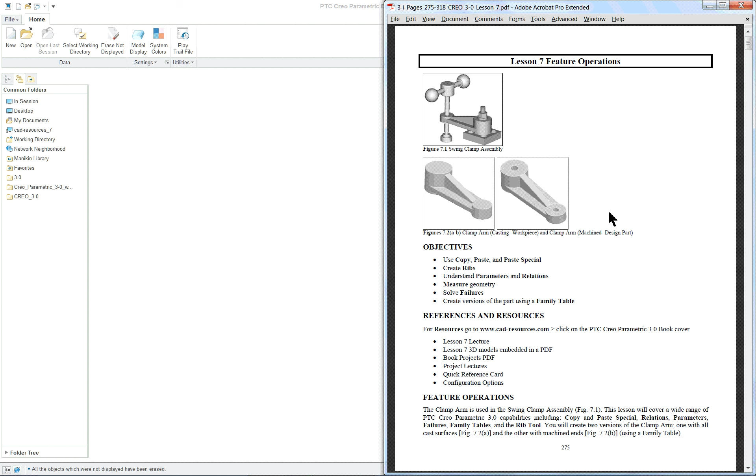Now this clamp arm is going to be used in the assembly drawing, and it's also going to be detailed in lesson number 10. So we're going to divide this into probably 3 different parts, and we're going to create the arm cast part, or workpiece, first.

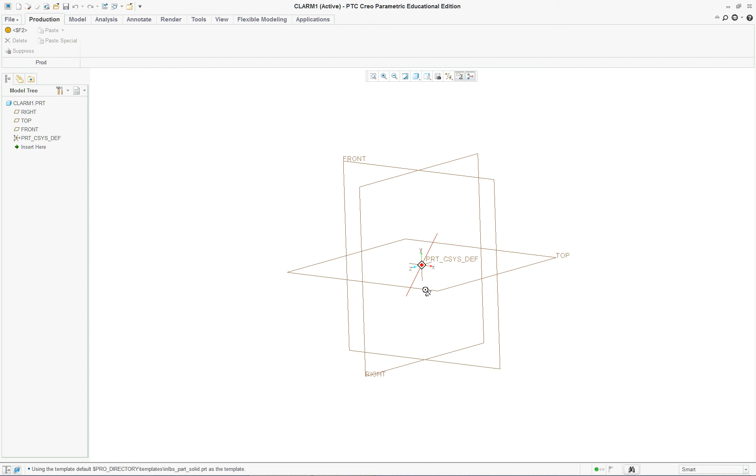Start with a new part, give it the correct name. I have my trimetric set, my standard orientation set to isometric, not trimetric, so I'm just going to rotate it around instead of going back in and changing it. I'll just work with it like it is. My first feature is going to be a simple extrusion.

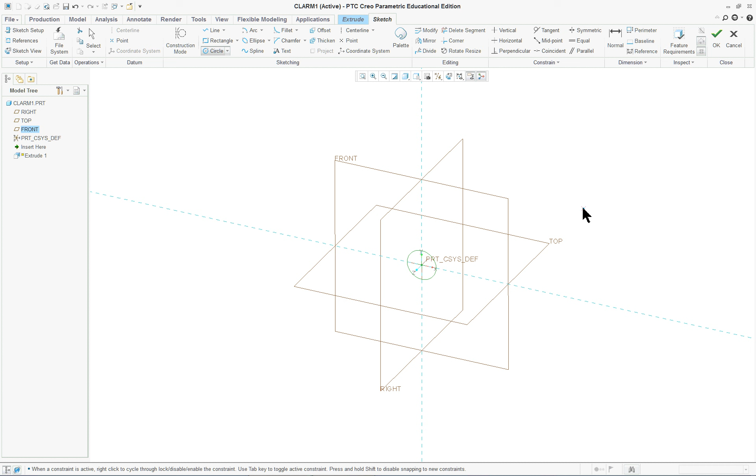I'm going to click on the front datum plane to sketch, right mouse button, circle. Circle in there, and I know the dimension of the circle is going to be 2 inches. Right mouse button, OK, and the depth is going to be 1.75.

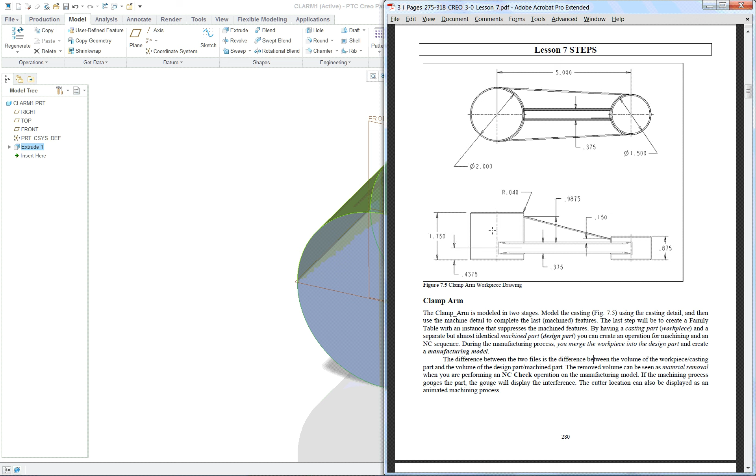Click. And if I go back over to here, I can take a look at some of these dimensions. So I made this first round protrusion here, 1.75 in depth, 2 inches in diameter.

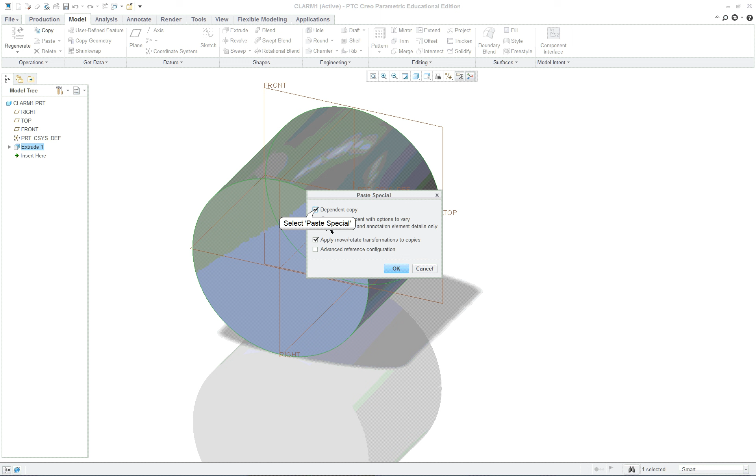Now it's still active, you can see it's selected over here. So what I'm going to do is click on copy and then paste special, and I'm going to apply rotate and movement to it. I'm going to turn off the dependent copy, I should say, so it will be independent.

And what it's looking for is a movement directional reference. So I'm going to come and select the datum plane that passes through the middle here, the right datum, and I'm going to drag it to 5 inches. Double click 5, that's the easiest way.

So I have my first feature and I'm copying that feature. I'm going to leave it in 3D when I work, and I'll leave the shading on with reflections.

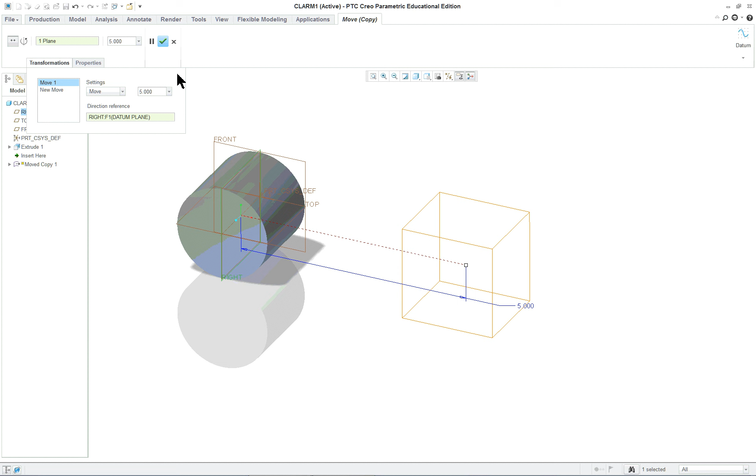Check. Now if I click right mouse button, edit, it's going to only give me the dimension in between the two copy, or the copy and the original.

If I deselect by clicking the left mouse button anywhere, and I double click onto the copy, since I made it independent, I'm going to change the depth here to 0.875, and the diameter to 1.5.

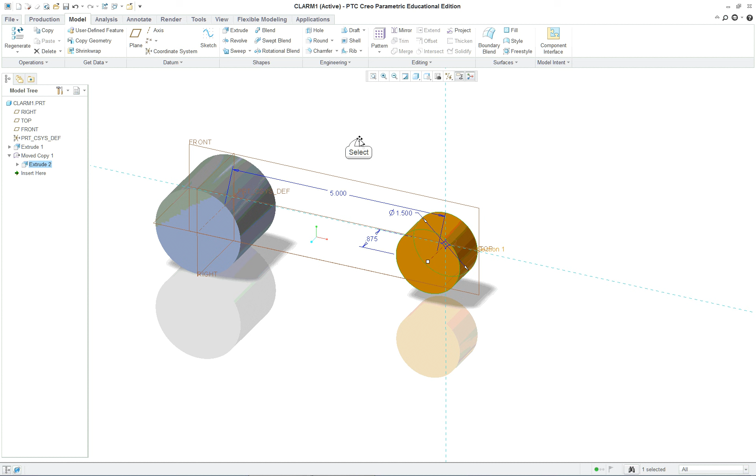Now I'm going to click with my left mouse button and click again, and it regenerates. So the next feature I'm going to create is a web between the two, and I'm going to start off by putting in a datum plane I can work with.

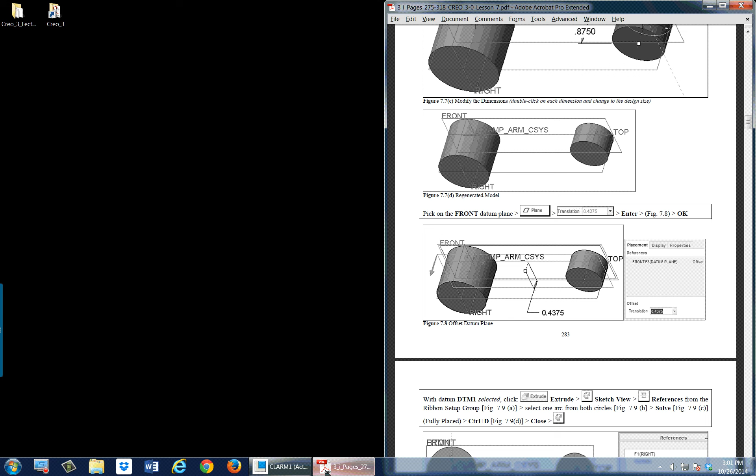So I'm going to select the front datum plane, and then select plane as the tool, and you can see it offsets it, and the size that I want here is 0.375, 0.4375, and enter. Click OK, and I have my new construction datum that I'm going to use.

So I want to make a web between these two. This web won't have any dimensions. So I'm going to click on extrude, and I'm going to still work in 3D. In the book, it makes you go into the sketch view in 2D.

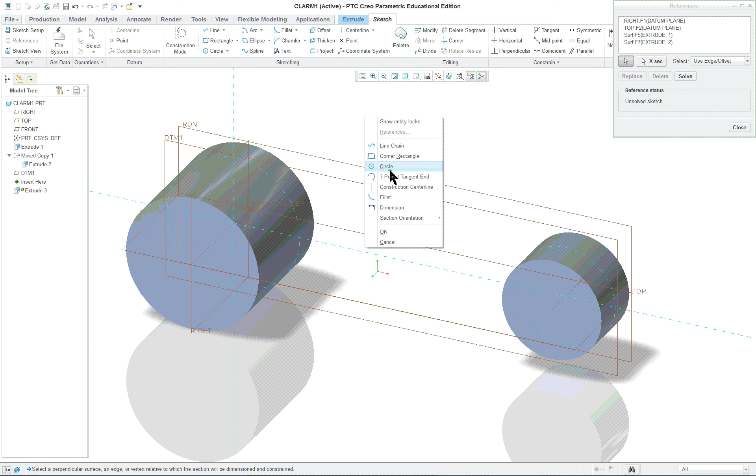So here, right mouse button, circle. Oh, before I do, sorry, middle mouse button, and I want right mouse button, use references as my selection, and pick on the two curves. Now when I go in and select circle, it's going to lock into the middle when I click there, and lock into the reference. Basically I want to repeat that.

Click the middle for our first reference and then the edge, like so. So you can see I actually have a section, but it has two circles instead of anything connecting them.

So what I want to do is go up to the line tool, select line tangent, and pick on the two curves on the top and then the two curves on the bottom. You'll see the T show up.

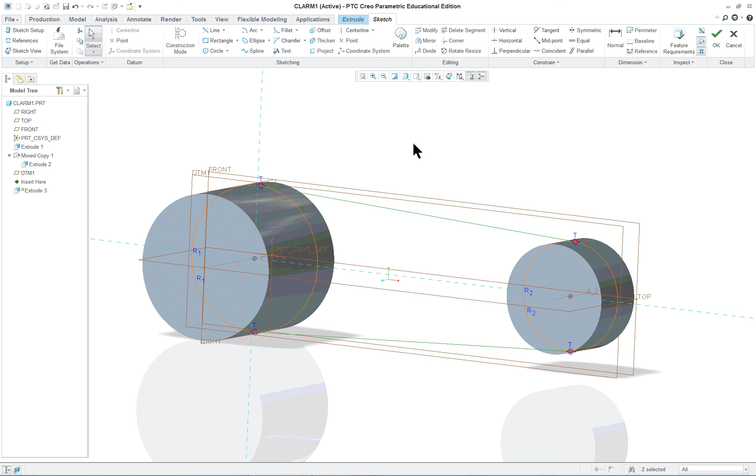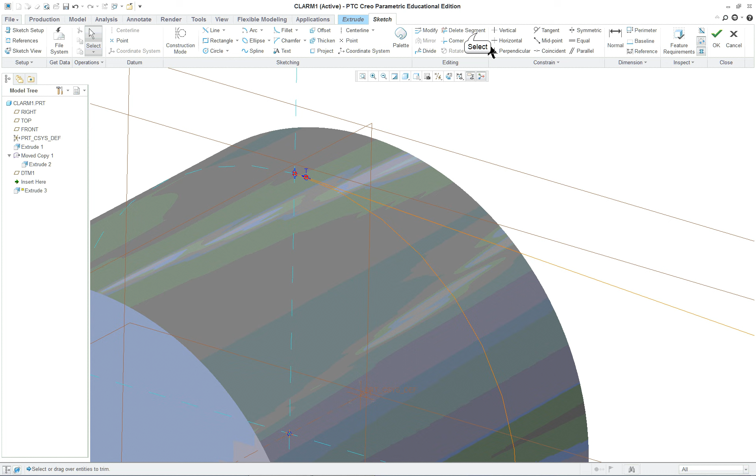Middle mouse button. Now it's got overlapping geometry, so I'll click delete, and I'm going to delete by dragging a spline through the outer edge to remove those entities. I still have something going on here, and if I zoom in I'll see a little piece hanging over, so I need to go in and delete that segment, and do it on the other side also. Then when I click my middle mouse button, I'll get my shaded section.

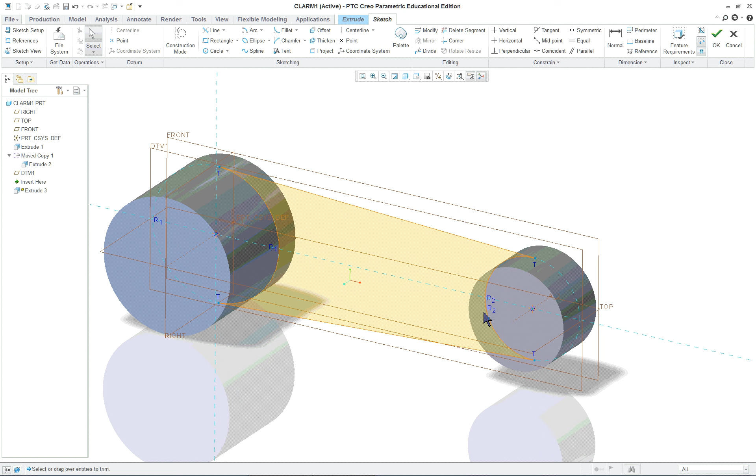So it's a valid section, no dimensions. We have T, T, T, T, and R1 equal R1, R1, and R2, R2. Most CAD systems divide circles into halves, which is why it's showing up as R1 equals R1, R1, R2, R2. So I'm going to click OK.

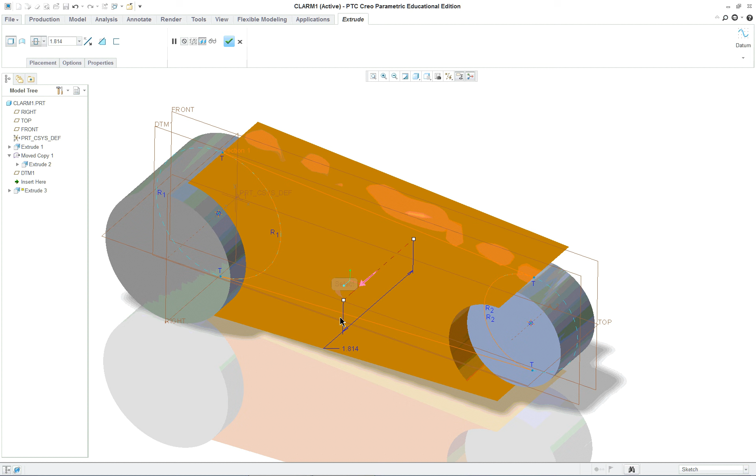And I want this to be symmetric, so if I put my cursor over the drag handle, select symmetric. This is going to be 0.375. Middle mouse button, and I have my second feature - well, I should say my third feature, because one is a copied feature.

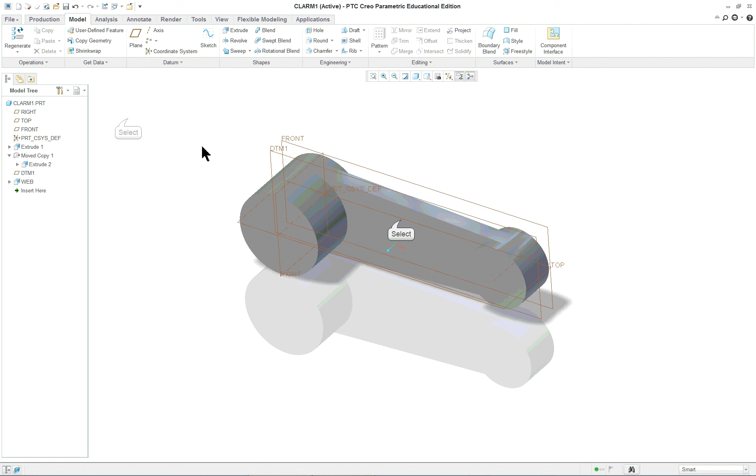Now I want to put a rib in between, but before I do, this last feature I created - if I click once and then another time, I'm going to change the name of that to a web. So I give a name to that feature itself.

And I'm going to go in and do shading with edges. As far as my appearance gallery goes, I think I'll make a different color, select a different color, and also edit that color.

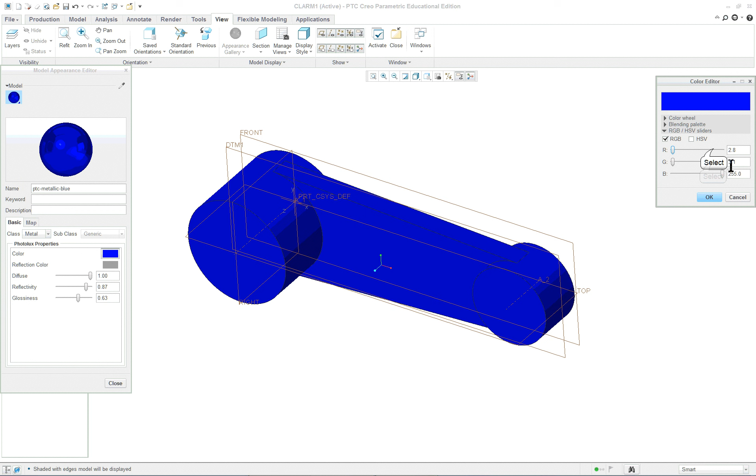And close. All right, now I want to connect these two cylindrical surfaces here, above the web, with a rib.

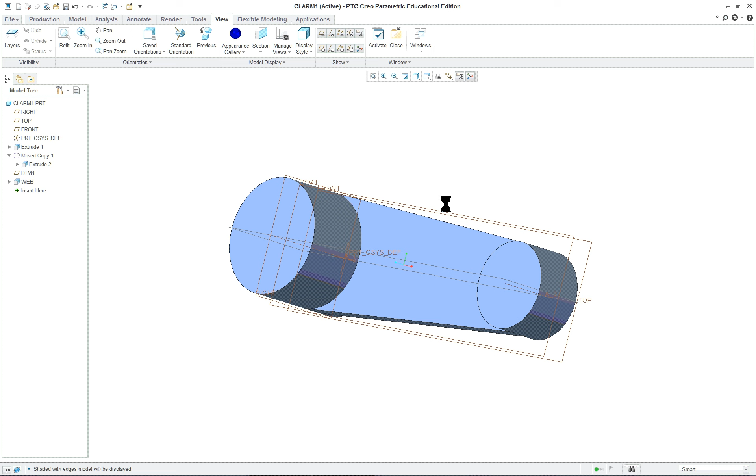Now the rib tool, I can pre-select if I want. I can pre-select the datum plane down the middle of the part here, then go to the model tab and select rib. Now when you do, you want to select the profile rib, not the trajectory rib.

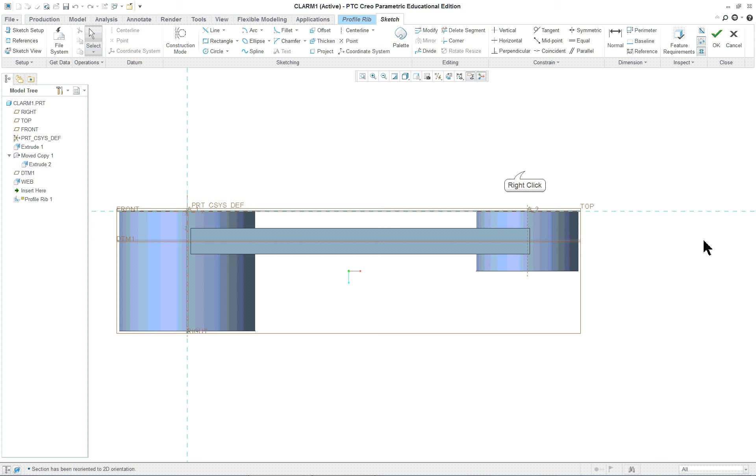And then I'm going to put this one into 2D. If I wanted to, I could actually flip the sketching plane, like so. Now I'm going to go from here to here, and I think I'll keep it into 3D still.

So basically, I want to put one piece of geometry in there. But before I do, I want to have new references - I want a reference for this and for this surface here too. Let me see if I did that right.

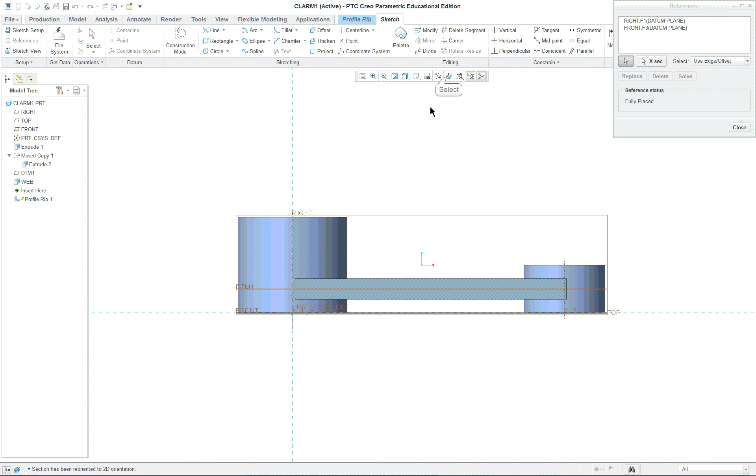It's hard to pick, so instead I'll put it into 2D and select my references here and here. Makes it a little bit easier. See the line that it put in there?

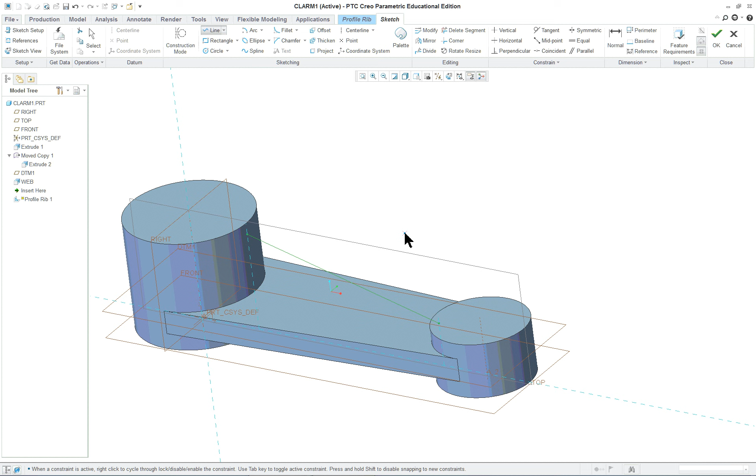It's a reference. So right mouse button, line chain, and I'm going to come over and select a point on each one of the references. Middle mouse button twice.

Still working in 3D as much as I can here. I want a dimension from the top face up to the point, instead of the one it's giving me. Right mouse button, dimension, click the face, upper face of the web, then the point, middle mouse button. This one is 0.15.

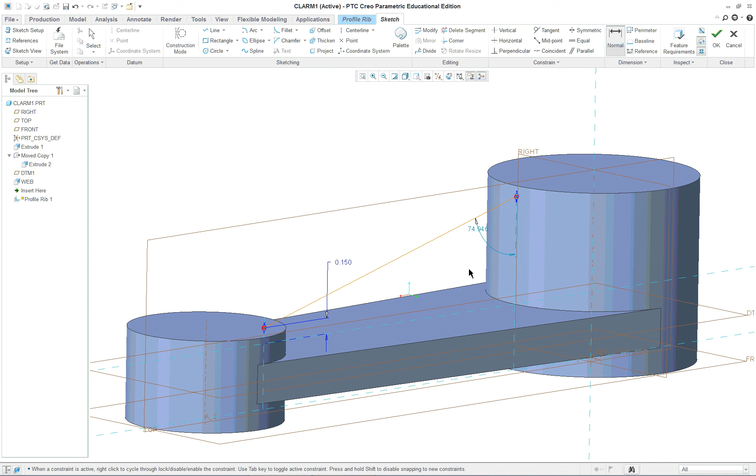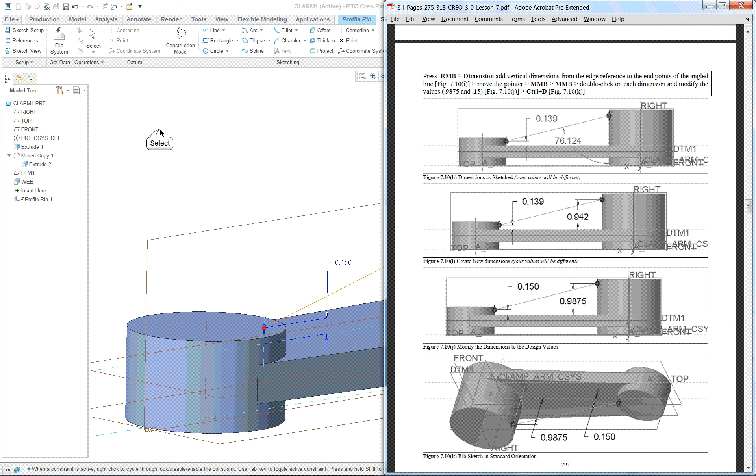And then I want another dimension, from this reference to this reference point. This one is 0.9875. Hit enter. I want to make sure that I did that one correct, so I'm going to scroll down here to get to it.

.9875. Okay, so I've got my geometry created correctly, and basically what's going to happen is anything from this entity towards the references is going to fill in. So click OK. If your arrow is going in the wrong direction, just flip it, and then drag this out to 0.375.

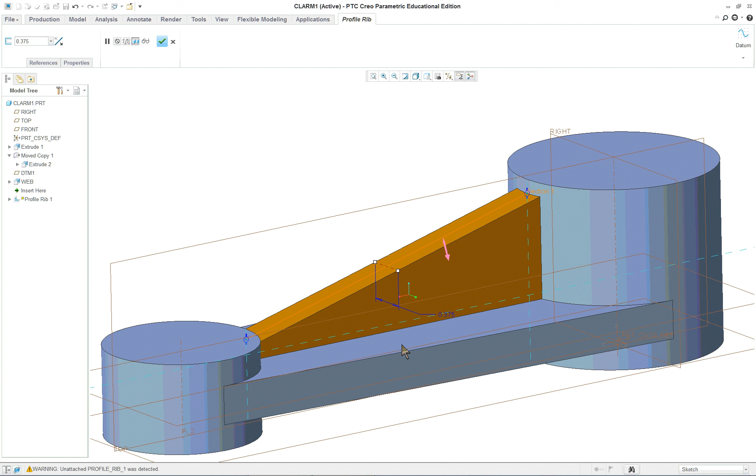Middle mouse button, shading with reflections, go back into my standard orientation, which is isometric. The last thing I'm going to do for this portion is put in a round, but in this case I'm going to select auto round, and it's going to be 0.04.

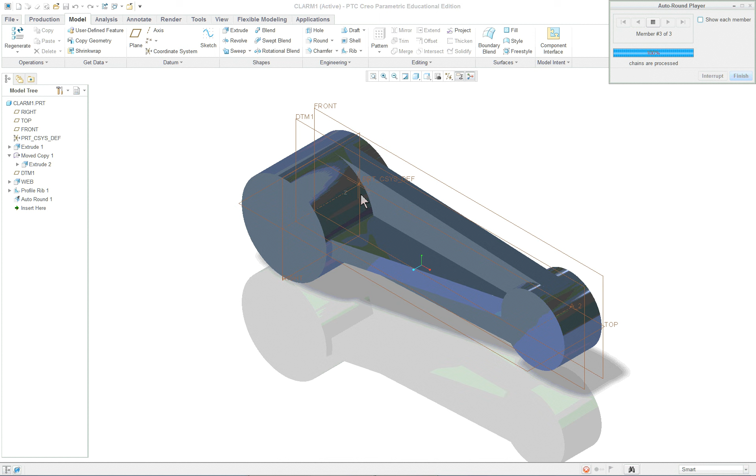Check - take a little while to process this. So instead of adding rounds to all the edges manually, this will create a completely rounded part. You can actually exclude surfaces and edges also with this command.

Our purpose here is to create a casting or a workpiece, and then later we're actually going to continue on and add cuts to the top and bottom of both of the cylinders here and put some holes in. Those are going to be the machined surfaces - these are all the casting surfaces at this point.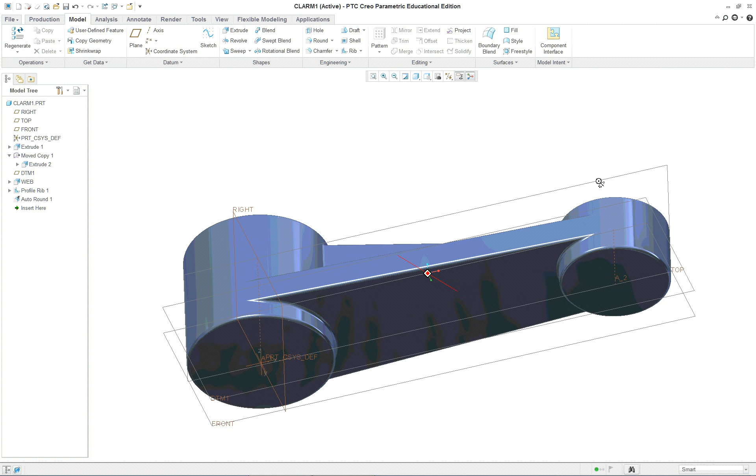And we did everything in 3D. Now, I don't know if you can see it on my model here - let's see if I change it to shading. Now it looks okay. The small surfaces should be shaded, and that's what you want in our options. I think you did the same thing when we did the Creo textbook.pro file.

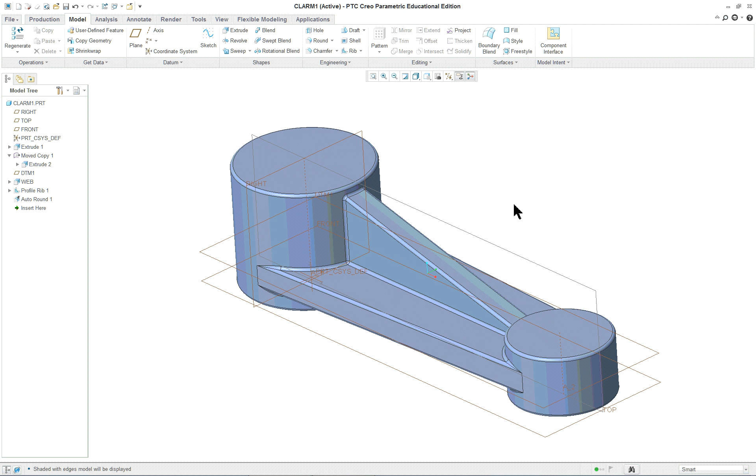So there's our first portion of the project. This ends lesson 7, part 1.